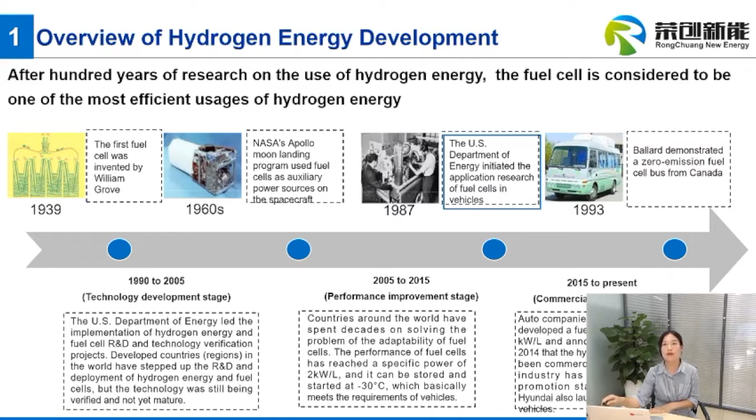In 1939, the first fuel cell was invented by William Grove. For the world-famous NASA Apollo moon landing, fuel cells also served as the auxiliary power systems. From 2015 to present, our fuel cell industry has entered into its commercial usage phase.

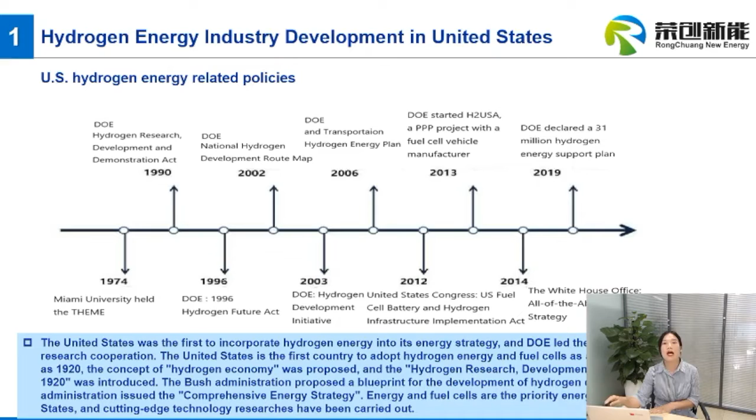Countries around the world are trying to issue various policies to support the industry and get a head start. For the United States, they were the first to incorporate hydrogen energy into its energy strategy. By the end of 2020, the United States had over 50 hydrogen refueling stations, and that number is going to increase to 200 by 2023.

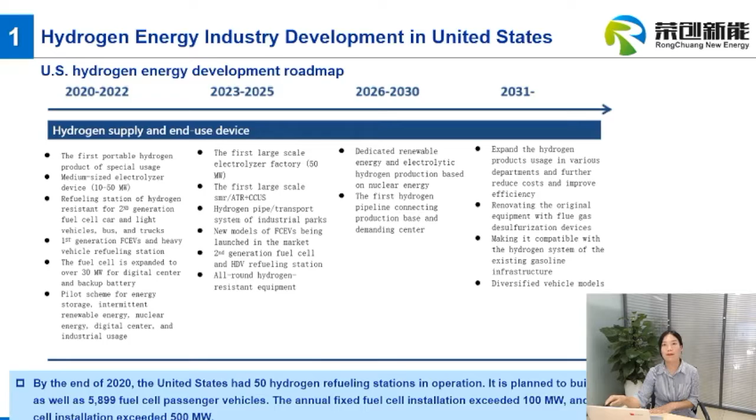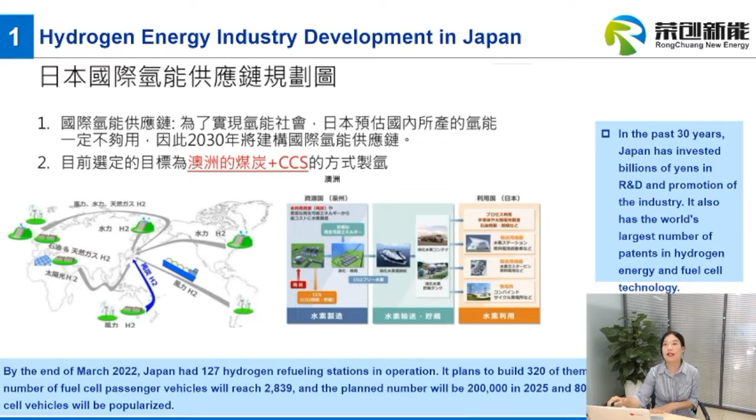For Japan, which is struggling with energy shortage and energy crisis, Japan proposes that it is going to be the first country to realize a hydrogen energy society. In the past several years, Japan has invested billions of yen in R&D and promotion of the industry.

Europe also considers hydrogen energy as an important guarantee for energy security and energy transition. Some of the most important players in this industry, including Alstom and Siemens, are also from Europe. Countries in Europe have enacted various favorable policies to support the industry.

For China, in 2020, our President Mr. Xi set a target for us: we're going to reach carbon peaking before 2030 and carbon neutrality before 2060. How about reality? The reality is very harsh. We still have very big volumes of emissions.

About 25% of emissions are from China, so for us to reach this goal is going to be a very challenging task. Also, we're going to reach the goal in 40 years, which took European countries 70 years to accomplish.

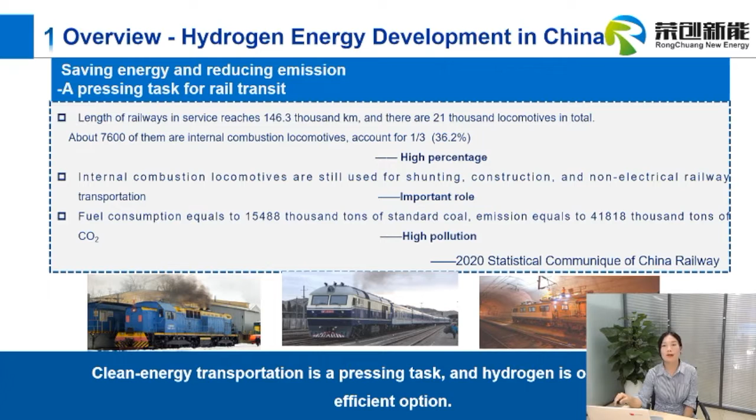What about the reality of rail transit in China? So far, we have 21,000 locomotives in total, and about 1/3 of them are still internal combustion engines. These engines emit a high percentage of emissions into the air. On the other hand, locomotives still play an important part in our life. They can do shunting, construction, and non-electrical railway transportations. So they're important, but how to cut the emissions from them? That's going to be a question.

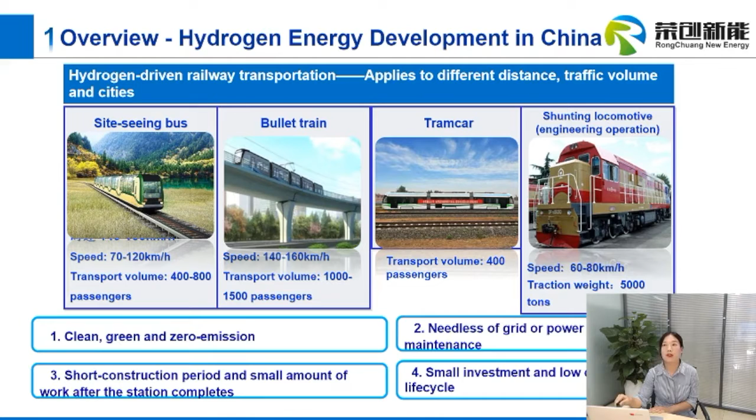To solve the problem, we've issued several lines of products, from sightseeing bus to bullet train to tramcar and to shunting locomotives. One of their features is very obvious: they're very green, zero emissions. Also, because there's no need to build a grid or catenary, we are going to invest a small amount of money, and the construction time is going to be shortened significantly. Also, the maintenance fee is going to be very low.

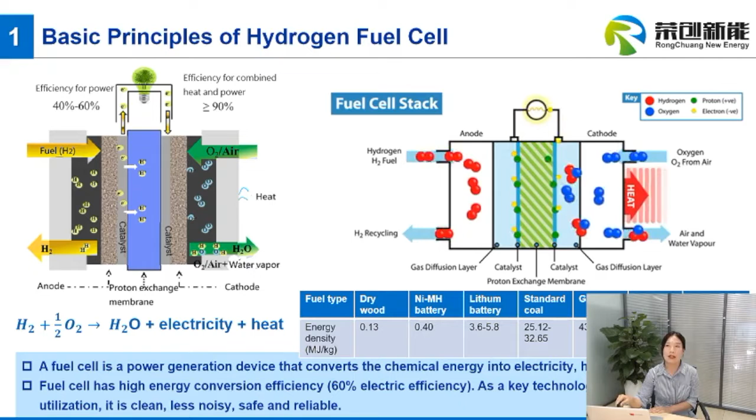But how is the hydrogen used to generate electricity? This picture can show how. Actually, the principle is very simple. It's the simple reverse reaction of water electrolysis.

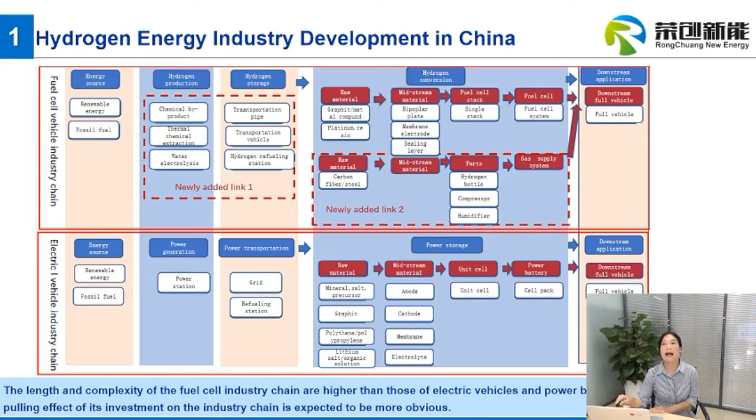Then who is us? For Rongchuang New Energy, actually in the beginning we were established to transform the research results of Southwest Jiaotong University into real projects. Even though the company is pretty new, the team behind it has actually done tons of research in the past several decades. We're the team behind the first fuel cell supercapacitor hybrid tramcar, and we're also the team behind the first fuel cell locomotive in China.

For Southwest Jiaotong University, it is actually one of the oldest universities in China. It is also called the cradle of railway engineers in China. In the past century, Southwest Jiaotong University has nurtured 300,000 graduates, and some of them have become academicians.

For the School of Electrical Engineering of Southwest Jiaotong University, it was founded in 1949. Generally speaking, the School of Electrical Engineering made all the breakthroughs and records in the history of China when it comes to the fields of railway electrification and high power traction.

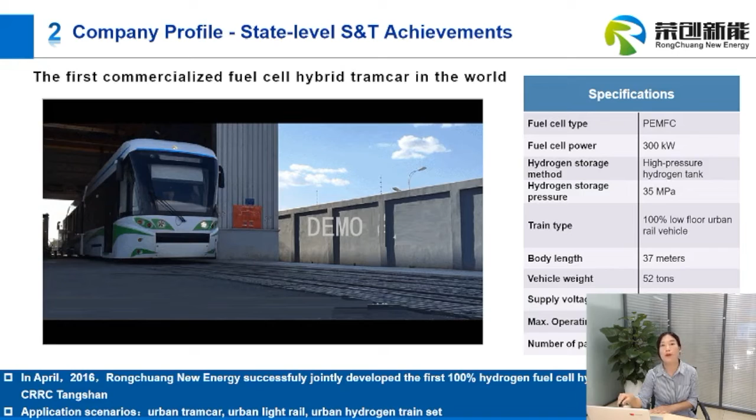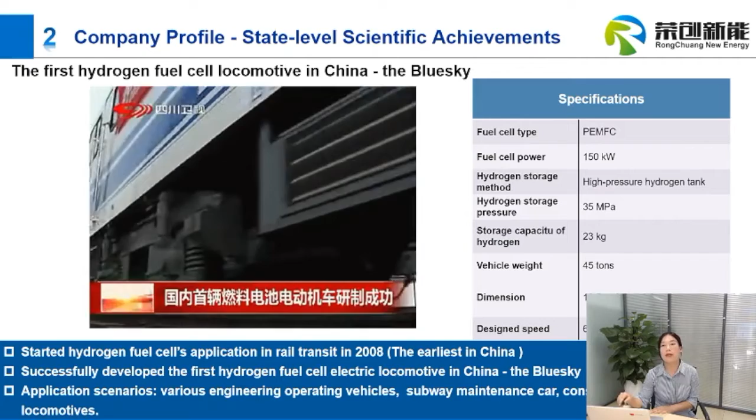This one is the first fuel cell locomotive invented by Mr. Chen Weizhong's team in China. We call it the Blue Sky. We started the related research for this project in 2008, and later we successfully launched the project. It can be used in various engineering vehicles, such as subway maintenance cars, construction vehicles, and shunting.

So if you have any problems with hydrogen fuel cells, just call us. One of our core technologies is energy management and energy improvement. We all know that for cars and vehicles, if it stops or brakes, the energy just goes away. But for our systems, when the car or train brakes or stops, we can use our energy system to recycle the energy.

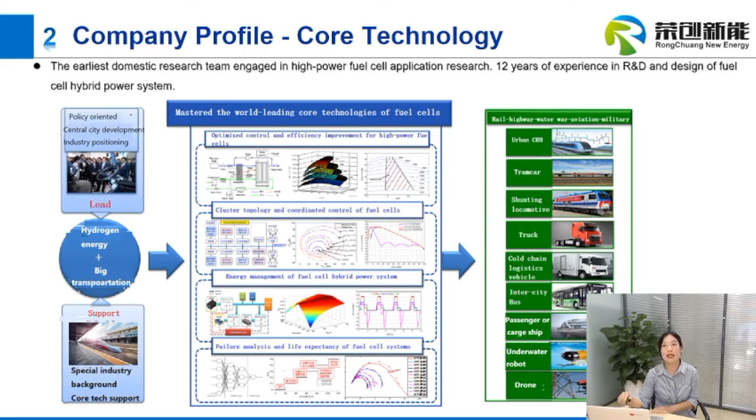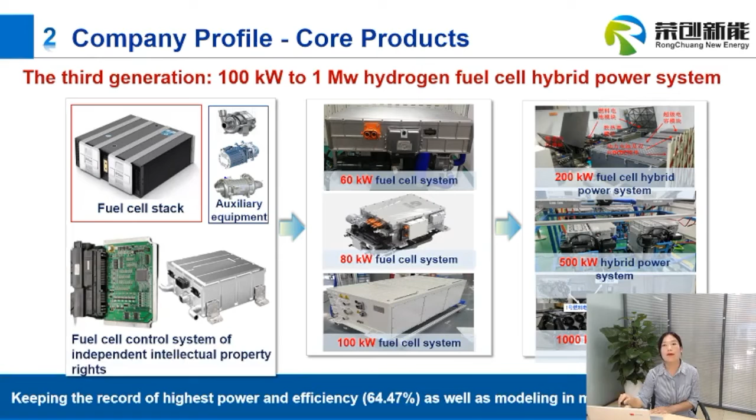This one shows the picture of our power systems. We have a wide range of power output, from 60 kilowatts to 1,000 kilowatts.

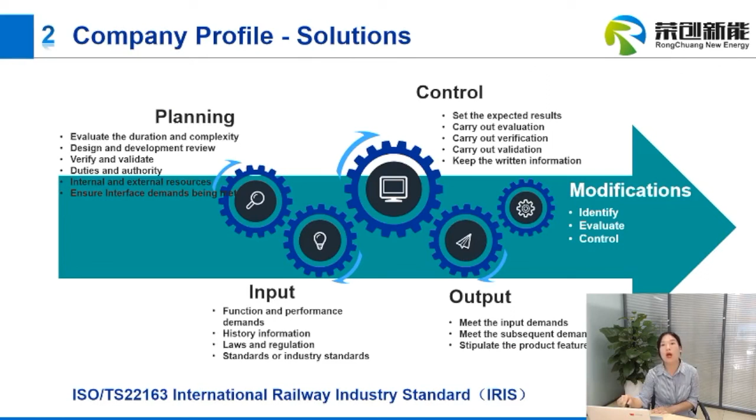And you know that we are a professional team, we have a lot of patents, and we have a profound history. We have over 10 years of industry accumulation. For our solutions, from planning to control, from input to output, we all have very stringent measures and procedures for us to follow.